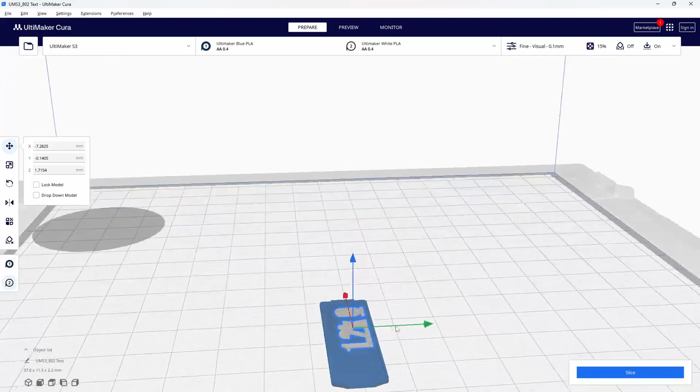Now, once those parts are saved as their own STL file, what I've typically done is I put them individually into Ultimaker Cura software, and then I take the time to manually go through and align each individual component together. It's frustrating looking back knowing that there was such an easy solution to this the entire time, so let's talk about that right now.

Alright everybody, so we're back at the desk, and what I want to do is talk briefly about how I organize my files to send over to Cura when I'm ready to print. So what I do and what I talked about previously is that we want to make sure that the body and the actual text itself are saved as different components so that they can be saved as different STL files.

Now, the best way that I've found to do that is to turn any bodies that you make into components. That way it's easy for me to differentiate between the different pieces that I would like. So if I'm looking at this piece here, you notice how I have one component for the actual body. When I hide that, it takes away the body, and I have one for the text.

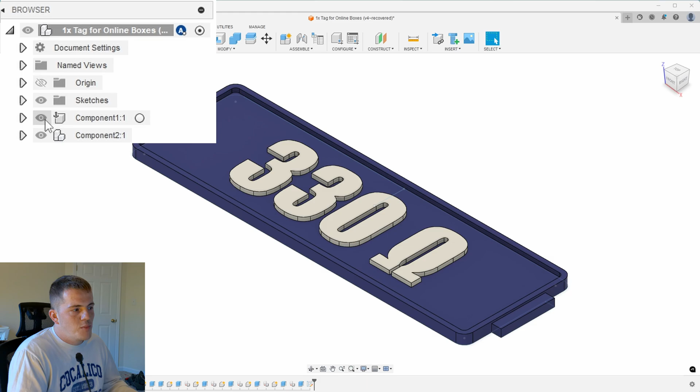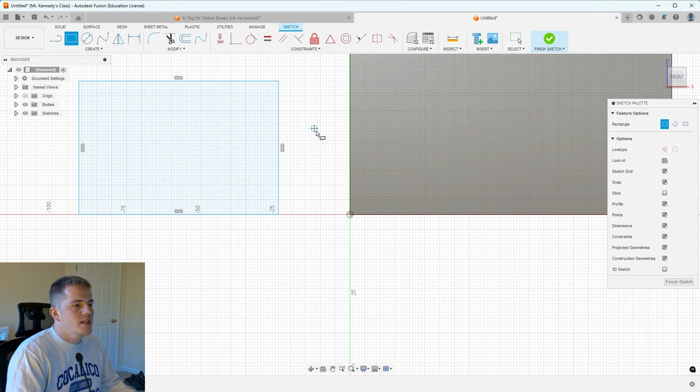Now, if you want to do that and you're not quite sure how that works, what I'm going to do is just create a quick body here. Extrude this out, do that, and then I'm going to do the exact same thing out to the side a little bit again. That way it can easily be seen, the differentiation between the two.

All right, so now I have two separate bodies. If I take each of those bodies away, you can see the difference between the two.

Now, in order to change these, right click, create components from bodies. Now you have each one as their own individual component, individual piece that I can select when I'm going to export those into 3D prints.

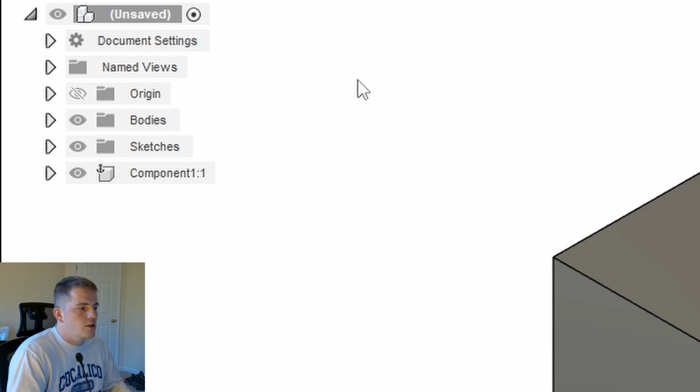So to do that again, go up to File, 3D Print, click on the actual component that you're looking for. I'll click on the body, click OK. And then I'll name this something like 330 body. That way I can easily differentiate those. And I'm going to do the exact same thing now for my component.

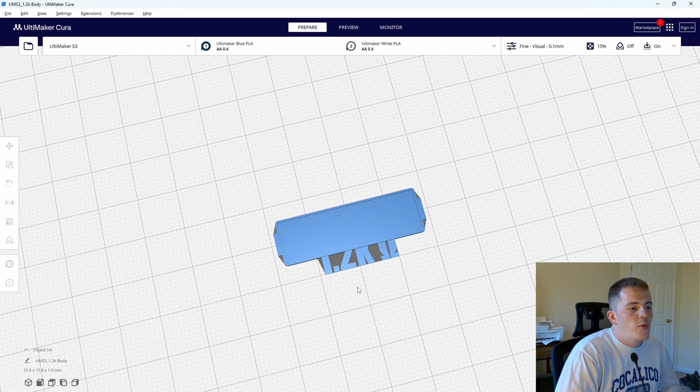Now, when we're actually in Cura, let's talk about how we actually get these to be dual colored prints. So when I have my two individual files - I know these are different than the ones I showed - what I need to do is click on the individual piece itself, and then look down in the left-hand corner and select the nozzle that I'm going to extrude from.

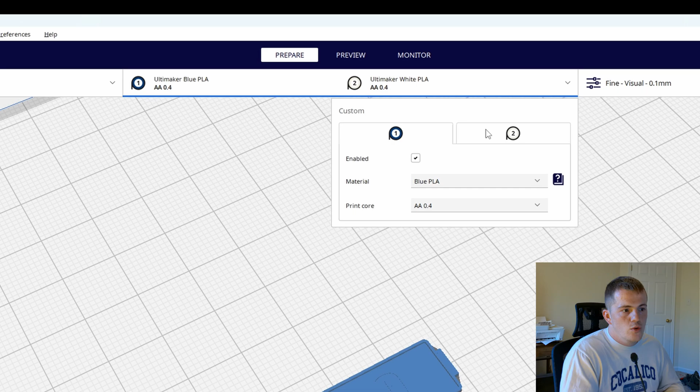So for instance, what I've done up top here is I've changed extruder 1 to be blue, and extruder 2 to be white, and that's what you're going to see on the left hand side here. So I want my text to be white, therefore I click on the text, change my extruder to printhead 2. Now I have one piece that is blue and one piece that is white.

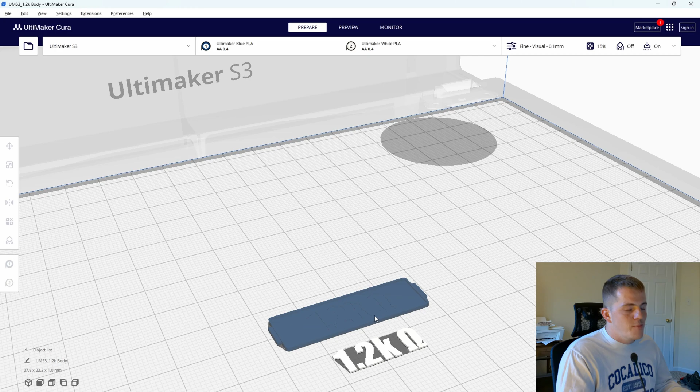Now, instead of manually organizing these, I showed a previous video where I manually organized these, so you can see that I've been doing this for quite a while. And again, it is super simple in order to organize these two pieces together.

So click on one piece, hold shift, click on the other piece, just have both of them selected. I right click, go down to merge models, and just like that, they are perfectly aligned together. Again, it is super frustrating to see how easy this has been the whole time.

I was reading a random article the other day and poof, there it was. So certainly frustrating, but really nice to know that this is easy to do, and hopefully this will save you a little bit of time.

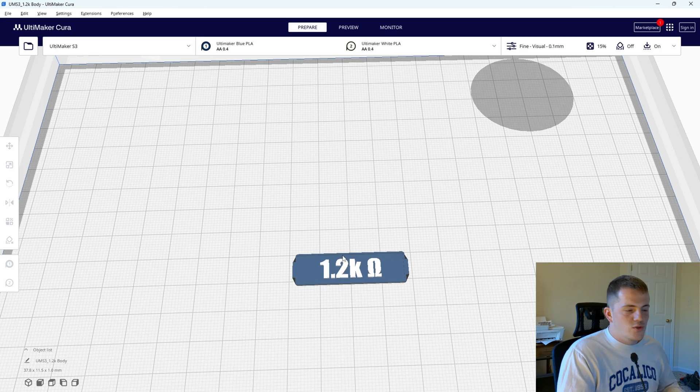Now, let me show you just another example, just so you can see it does work with multiple different pieces. So now these pieces are going to be a little bit bigger. I'm going to save the first one. Again, same thing, I'm going to do the second.

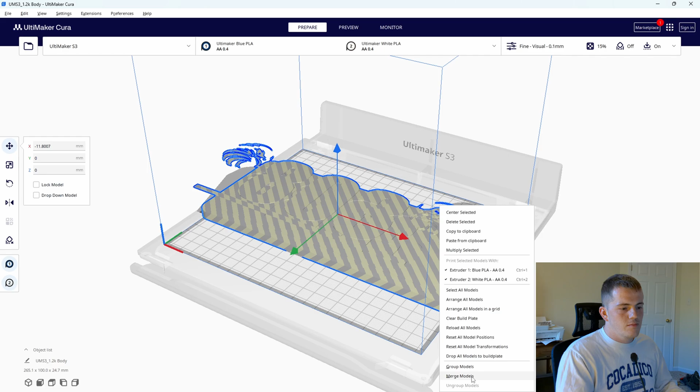So it's white. Click on one, click on the other, right click, merge models. And then now that they're merged, they will both shrink at the same rate. You can see that they are perfectly aligned together, no difference between the two. It is absolutely perfect every time.

You can drop that model down to the floor and we are good to go. It's perfect. It's just so easy, and I'm again disappointed I didn't think of it sooner, but excited to share that with you all.

It's a very easy way to make Ultimaker Cura dual colored prints using that Ultimaker S3. All right everybody, so that's the video, just a quick and easy one for you, showing you how to set up Ultimaker Cura and your Ultimaker S3 or any dual extruder printer in order to get dual colored prints just like these. Great quality, really sharp, really easy to do now that you actually know all the settings that Cura has to offer. So thank you so much for watching.